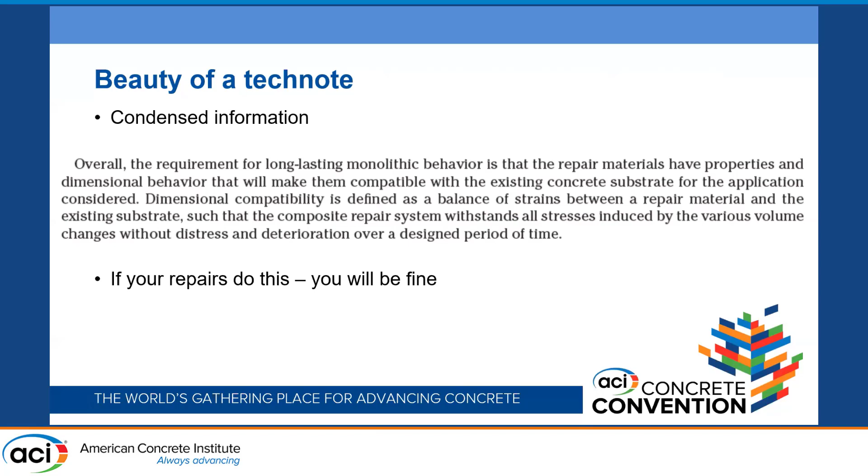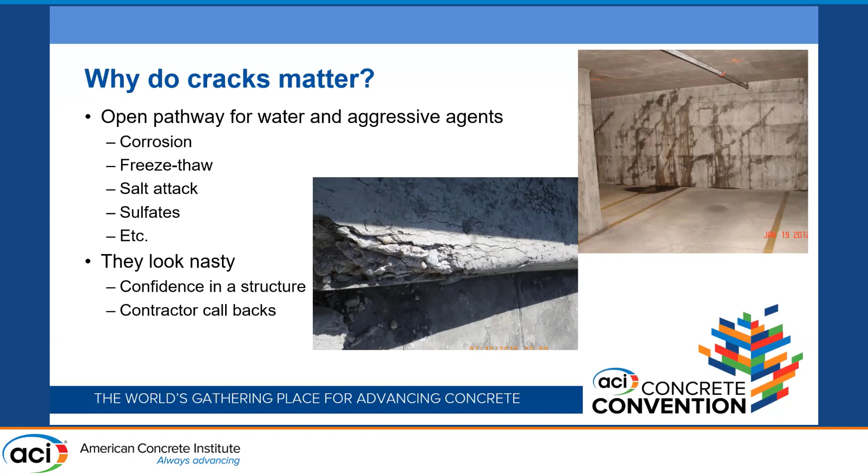move on. So why do cracks matter? Cracks are just generally bad. Pathway for aggressive agents, corrosion, freeze-thaw. Larry talked about this. What they didn't mention really is this one. They look nasty. Nobody wants to have that as their parking structure. Nobody wants to have that as your seat in a football stadium. So they're a problem. And we're going to talk a little bit more about how we can reduce and control cracking and what the importance of some of the concrete repair materials properties mean.

And this is some of the essential beauty of Fred Goodwin. All cementitious materials can crack. Yes, it is true. Cracks occur. Alex always used to hammer me on this. Tensile strain capacity, not necessarily the strength. When the strain capacity is exceeded, they crack. That can be load, restraint. Most likely it's restraint, displacement. And restraint is shrinkage. Shrinkage due to water loss or chemical shrinkage. It all happens.

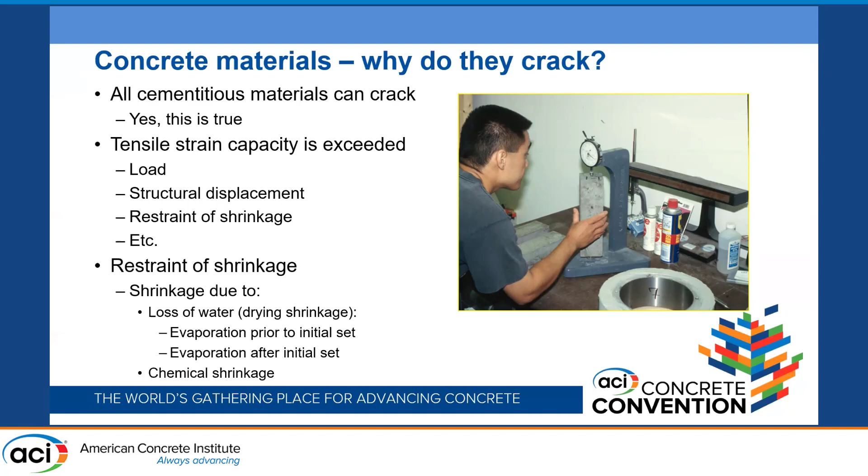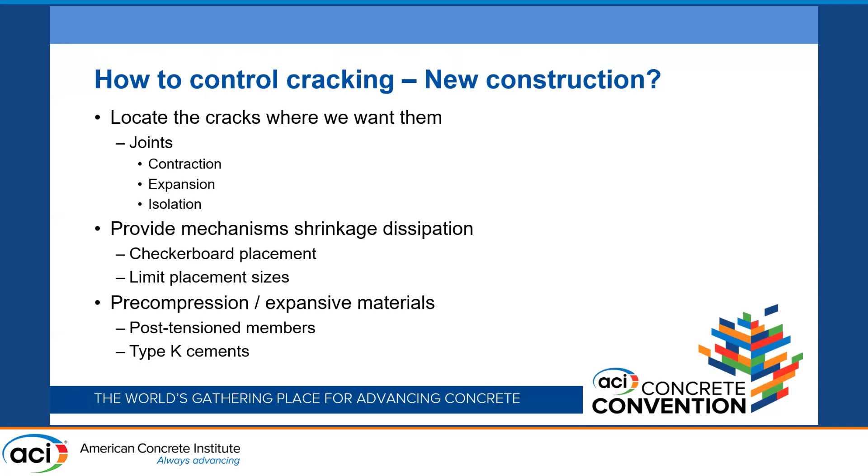And repairs are inherently different. And that's one thing that we always hear about from Fred. We always hear a lot about a lot of separate different codes. They're very different from new construction, because in new construction, we can make it crack really any way we want. And that's kind of cool. We could put in joints. We can change the placement sizes. We can checkerboard. There's all sorts of stuff you can do. In repair, you get stuck with what you start with. And that's kind of the beauty of it. You got somebody else's problems that you're dealing with, and you get paid more money that way sometimes.

So repair is a lot more sensitive than new construction, because you're always dealing with that restraint of the existing structure. You're always trying to put new material back to something that's already there and letting it shrink. And these are some pictures from a restrained shrinkage test that was done and developed by SPS. It was called the SPS plate test. It's not very common, but there's a piece of metal with some epoxy and sand on it that provides restraint. It's clamped at one end. You put the material in it, you let it cure.

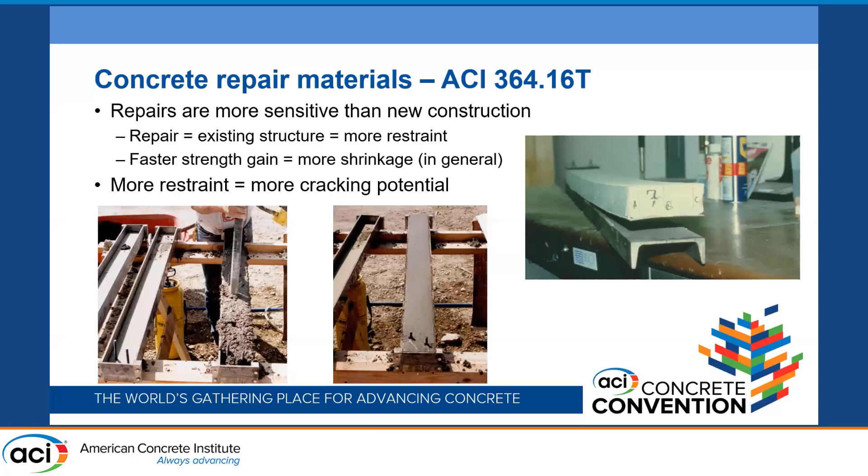And we did some of these back in the lab way back 20-something years ago. And it was unbelievable how much these things curled. Restrained on the bottom, they just cranked it right back up. It was unbelievable, and really highlights the situation of what happens with restraint. It causes that curling. So we get into dimensional compatibility, and this is where Benoit did my presentation for me. Thank you. We really need to think about the restrained shrinkage potential of the material.

Restrained shrinkage, not necessarily drying shrinkage. That test before where the gentleman was doing a drying shrinkage test, that's fine. That'll never crack because it's not restrained. It'll shrink, but it'll never crack. When we talk about control of cracking, we need to understand what's preventing that structure from shrinking, or what's not allowing that material to shrink, and what's the impact of that going to be.

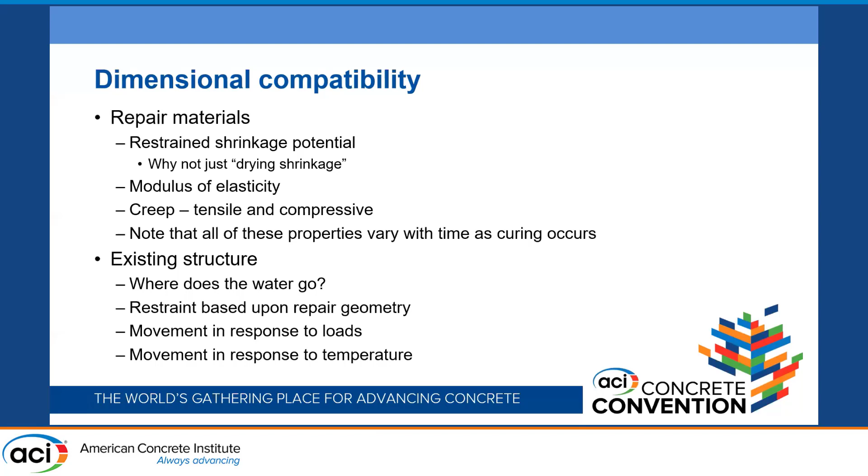So existing structure, place new material, where's the water go? Where's that mixed water come from? We know we all start with concrete. We add more water than we need in order to get it placed. That water's got to go somewhere. And in repairs, it can't really go into the existing structure. It generally goes one side. Where you lose the water is where you get your shrinkage. And that's when you get problems.

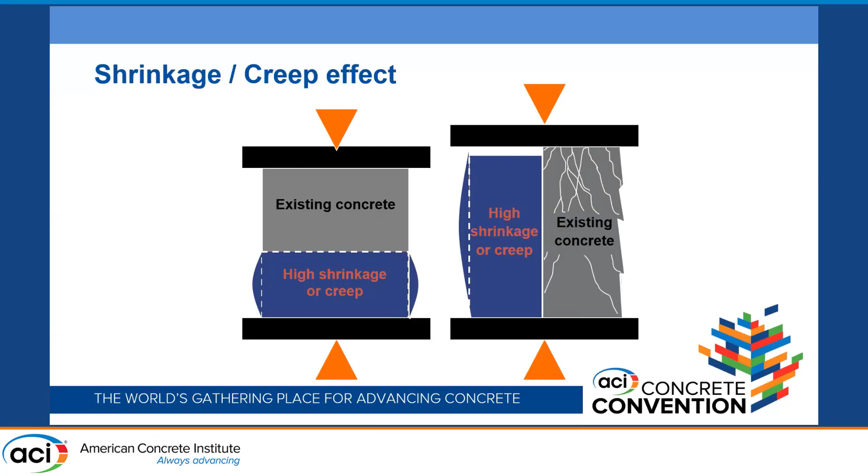Some slides. These are basically recovering Benoit's effects. Looking at, again, a repair situation, original concrete, water loss in the repair material, shrinkage and cracks on this face. Understanding this restraint and controlling it, and Ben talked about protective repairs.

The best protective repair material you can get is actually old chewing gum. It's flexible. It sticks to anything and you absolutely cannot get it off of the material. If you get a little bit more compressive strength out of it, it would be the best repair material ever. And you just can't get it off. So that's a future Master Builders material, Fred.

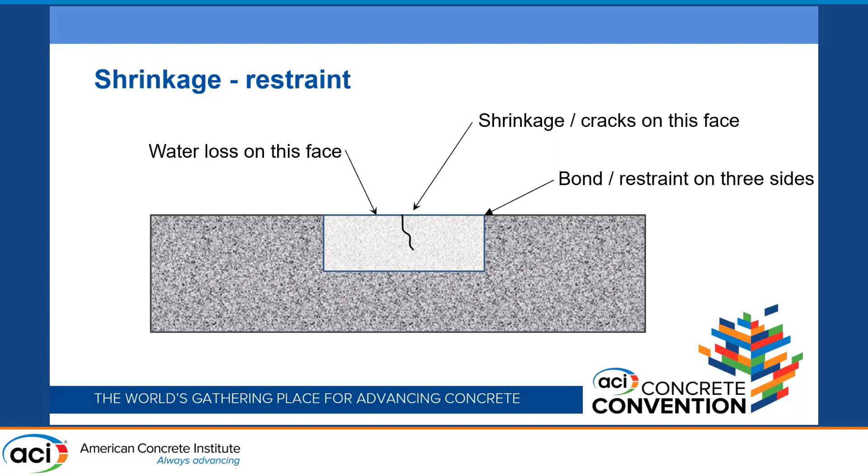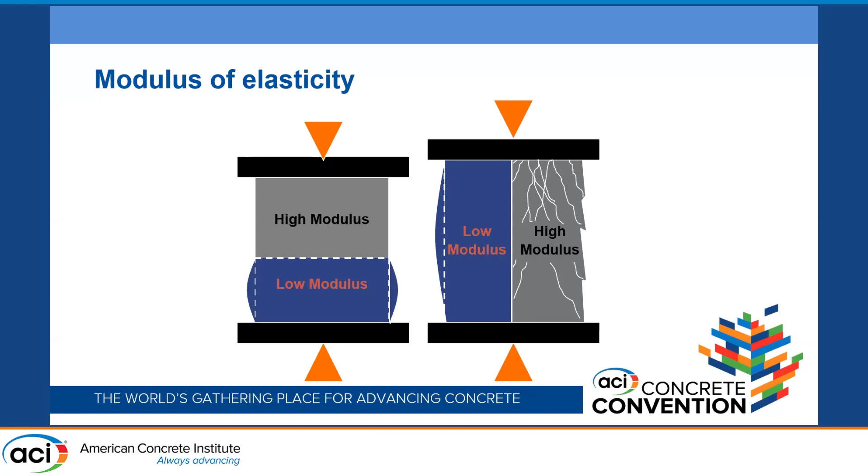Ben already thankfully did this. Effective differences in modulus of elasticity, whether it's in parallel or whether it's in series. Higher modulus attracts more load, or the lower modulus ends up allowing it to deform more if it's in series. So talking about the potential for limiting cracking in repair materials, this concept of extensibility of the repair material, it's hard to do. It's really hard.

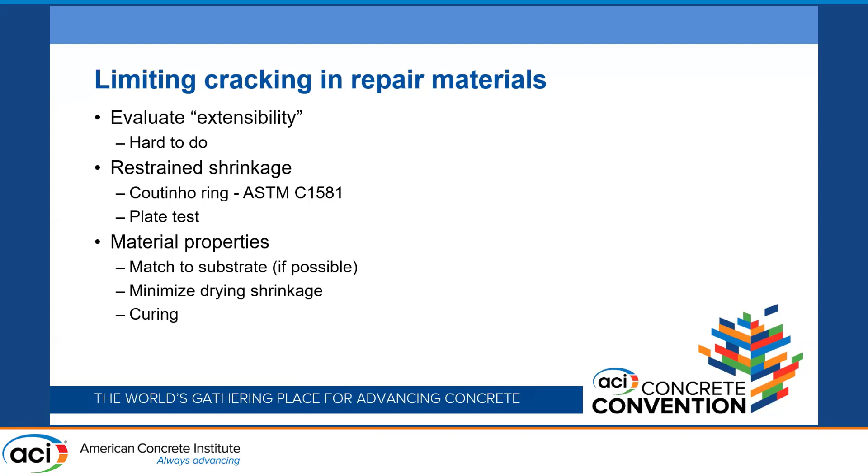Some of the best tests, I think, are these restrained shrinkage tests. The ring test, it's an ASTM standard now. Did you develop that one? Did you work on that one? I did not do the development. Okay, that's what I thought. That is probably one of the best tests that you don't see results from very often, because that inner ring of steel provides the restraint, and you look at when it cracks and how big the cracks are, it gives you an idea.

As Benoit mentioned, matching material properties to the substrate, that's critical for elastic modulus. Minimizing free drying shrinkage. Drying shrinkage isn't everything, but if you minimize it, that's always better. And then curing. All critical things to actually limiting cracking in repair materials.

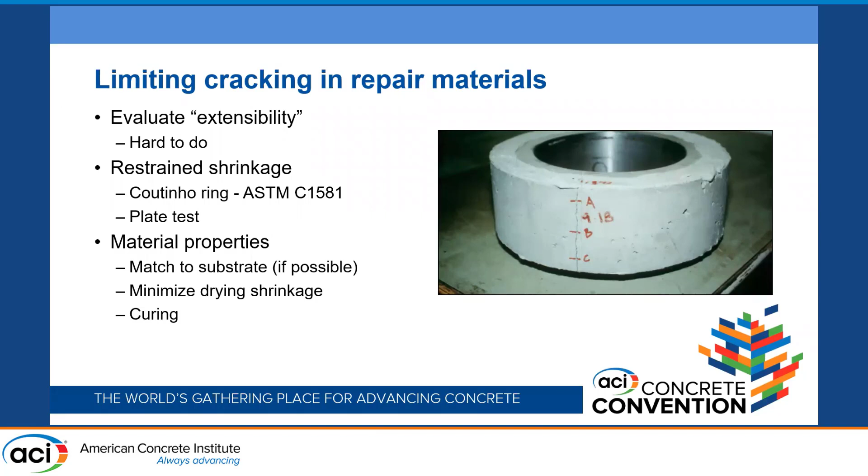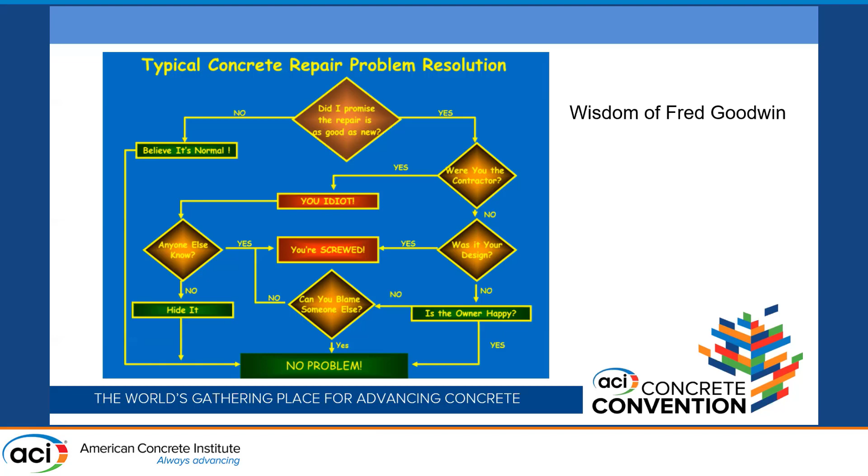So getting a little bit more serious about the impact of Fred Goodwin. I wanted some pictures of Fred Goodwin. And as Lee Ying mentioned, I'm currently a TAC member and I took over from Fred. And obviously Fred is a tremendous technical resource for all of us, an ACI committee chair, tremendous leadership and documents. But I'm going to give you a little bit of perspective as a committee chair that had Fred as his TAC contact, and what he was like as a TAC member.

He made sure you followed the rules. 100%. You will follow the rules. And when you're stuck on a repair code with a big deadline coming up and you want to do something less than a 30-day ballot, you better get permission. Right, Fred? Right. And I did that. I asked for that permission a lot, as people know. And you always got it. And I always got it.

But another big thing that Fred advanced in this industry is the concept that repair is a separate practice from new construction, and he reflects that in a lot of what he did in ACI. And this concept really got reflected in TAC. All committees are important, and I'll tell a little bit of a story.

All right, so ACI 318 is one of the bigger committees, and they kind of had a habit of ignoring TAC comments. And Fred basically said, no, they're going to be properly addressed. And that was great because it really needed to be said that all these committees need to be treated the same. And thank you for that, Fred. Really important. All committees are the same and all of us are important.